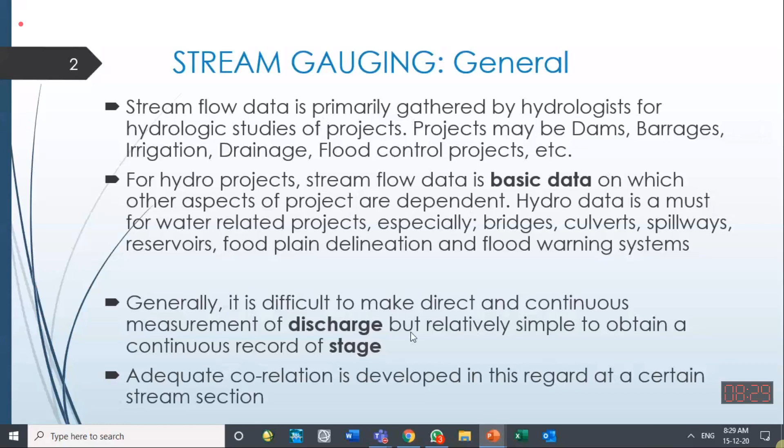Similarly, for structures available with the irrigation department, they take care of stream gauges on those structures. So in the upper Indus in Pakistan, the Surface Water Hydrology Project is most suitable to get the data, and for barrages, it is usually the relevant irrigation department looking after the stream gauges. Generally speaking, discharge and stage are the two things we measure.

Why do we measure the importance of stream gauging? Because we need water for different purposes - for energy, for irrigation, for navigation. Quantification of this water, knowing the water levels and discharge, is essential for using water efficiently. So we need to measure streams at different locations for water supply, human settlement, irrigation, and water for plants.

Streamflow sometimes also causes floods. So if we want to forecast floods, we need to see the behavior of that stream in historical events. What do I mean by behavior? For example, water level or flood level depends upon the channel cross section and channel slope. The same discharge in one channel may cause a flood, while in another channel the same discharge does not cause a flood.

For example, high flood in the Indus River at Chashma starts from 5 to 6 lakh cusecs. 10 lakh cusecs is an exceptionally high flood there on the Indus at Chashma. But for the Ravi, flood may start from 100,000 cusecs - at 1 lakh cusecs, flooding occurs there.

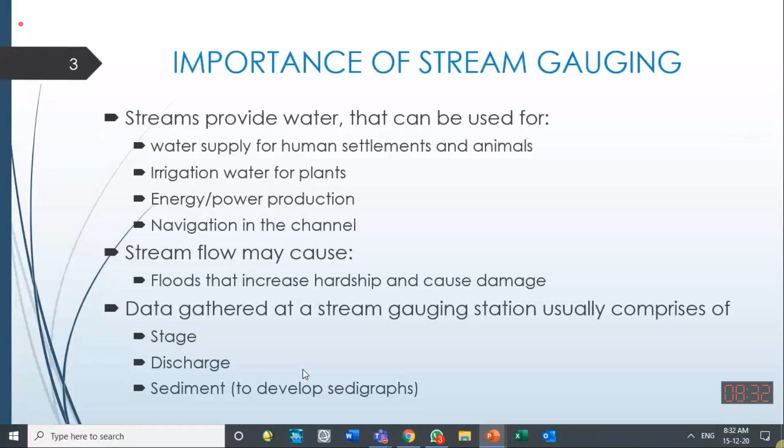So these are the three data usually measured, and in addition, water quality parameters are also measured by environmentalists or water experts. This slide highlights that if you have to select a new stream gauge station, you should take care of these things.

Initially, you should know what factors control the relationship between water level and discharge - what is the factor controlling the relationship between water level in the stream and the discharge and flow rate? There can be two factors, and the factor which controls this, we say...

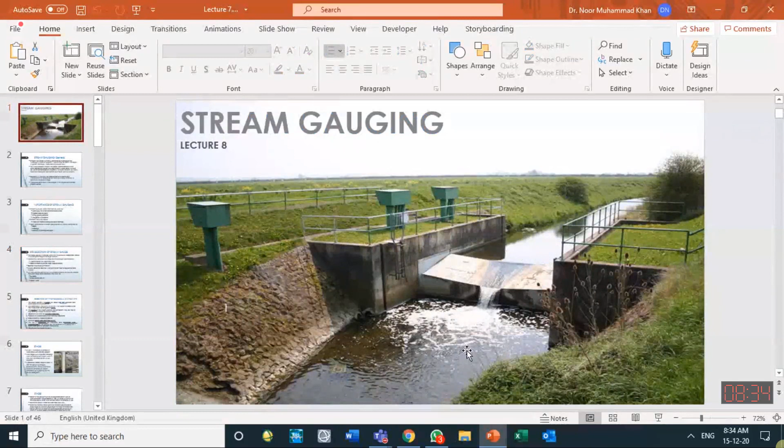An example of sectional control is a fall - a sudden drop in the bed level of the channel. For example, in this figure we can see there is a drop in water level. Such a sudden drop can cause a control over the flow rate and discharge.

Similarly, rapids are steep slope channels, and they can also control the relationship between water level and discharge. If there is a weir or an obstruction in the floor, that can also give us a control - we call that sectional control. So this relationship between stage and discharge is controlled either by a cross section - which can be a fall structure or an obstruction like a weir structure - or the depth and discharge relationship is controlled by the stream itself.

Reach of the stream control. So what do we mean by reach? If there is no rapid, no fall, no obstruction, there is still a relationship between water level and discharge. So what is controlling that relationship?

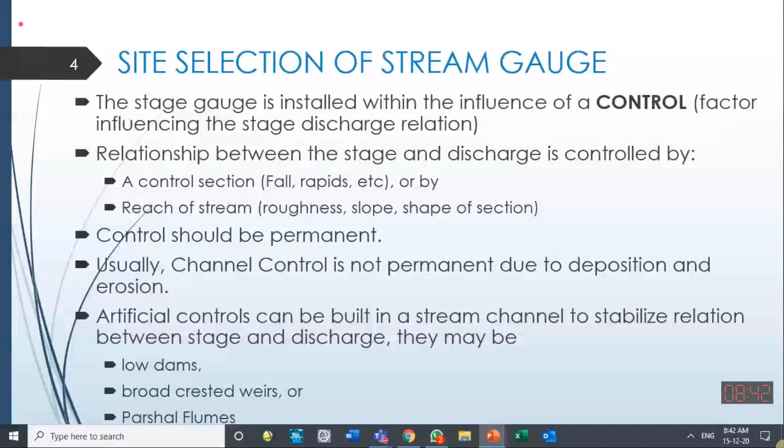So we should be able to construct such structures if we want to install an artificial control in the channel. Knowing the concept of control and the types of control, here are the guidelines you should observe while selecting a new stream gauging station.

It should be installed at a relatively straight reach. What's the alternative? Installing a gauge station on a curved reach. If you've been to the northern areas, you've seen rivers like the Kunhar River making many curves—curvature is present there. We should avoid locating the stream gauging station close to a curved part of the stream.

At least 300 feet upstream and 300 feet downstream of the station should be straight reach. The reason is that on a curvature, water depth is usually higher on the outer side, the convex side. Picture the plan view of a stream with a curvature—one side is the outer part (convex), the other is the inner part (concave). On the convex side, depth is usually higher, and on the inner side, depth is lower.

Insert a line. For example, you have a river like this, and a tributary is joining over here. So the flow is from top to bottom. If you have installed a station over here, insert shape. If you have installed a station over here, it means you are interested to know the discharge and stage of this channel. Okay, of the left channel in this figure, you are interested.

So if there is a tributary coming over here on the downstream side of this stream gauge, and this tributary is quite large, when it joins water to this place over here, there is a possibility that this water goes up also, in addition to going downstream. So depending upon the channel slope, some effect of this tributary can proceed on the upstream side also. So we should avoid locating the stream gauging station where a downstream tributary can affect the water level of the stream gauge on the upstream side.

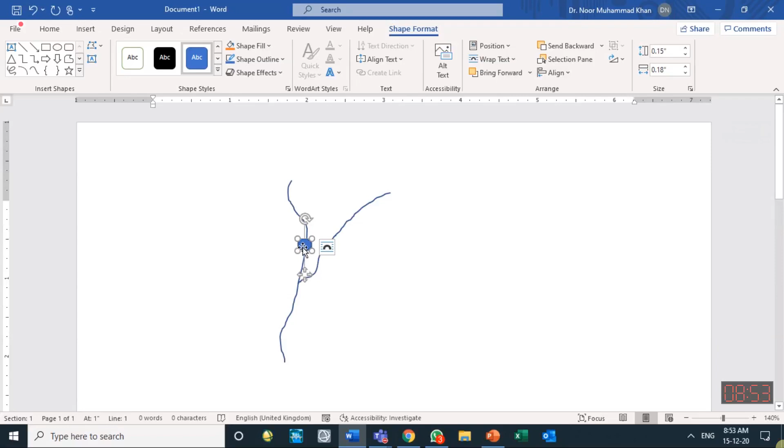If I have measured a water level at this stream gauging station, and the water level was wrongly increased because of this downstream tributary, the effect of this tributary has raised the water level to a higher elevation. It means I will be giving a wrong message to the people that more flow is passing over here, when all that flow was actually coming from this tributary.

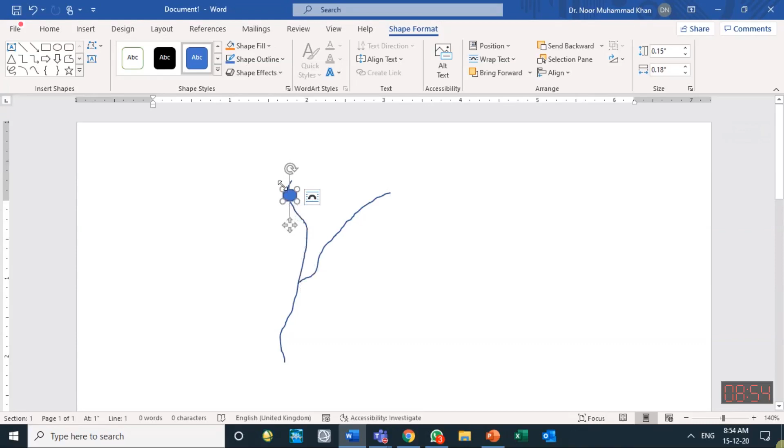We will be giving wrong information that this tributary is having higher flows. So for this reason, if this is the case, we have to move this station either downstream of this confluence, or we have to move it sufficiently upstream so that the effect of this confluence point is not there.

So when we place it downstream of the confluence, we are measuring the discharge coming from both of these streams. And if we place it upstream, then we are measuring discharge of just one stream. So both options are okay, fine for us.

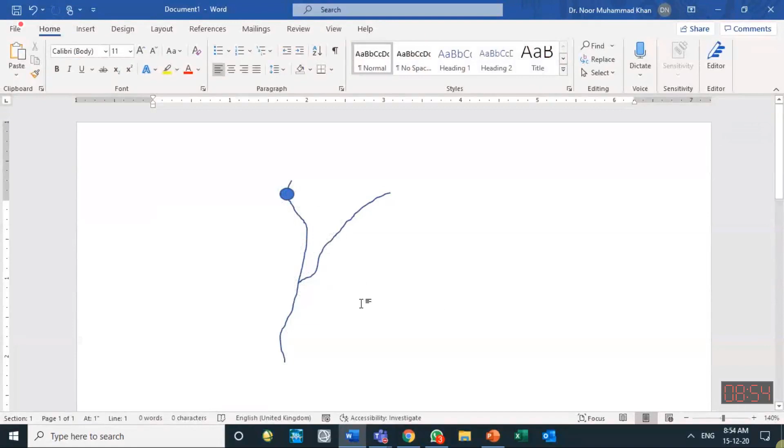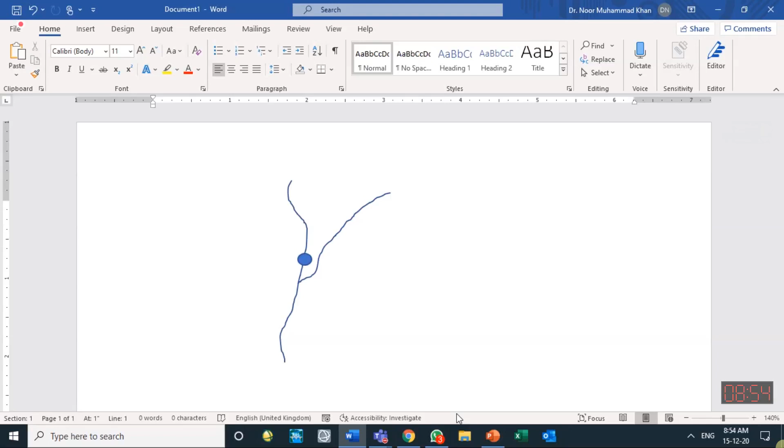But if I put it close to the confluence and tell people I am measuring the discharge of only this stream, when actually the effect of these streams is also reaching over here, that will be a wrong message going to the people, and we have to avoid that. So that is the meaning of the requirement: there should be no backwater effect from the downstream tributary.

This is important when you visit a stream gauging station which has already been constructed. You should check for such things. If there is some tributary on the downstream side whose effect can reach the stream gauge station, then you can comment that this is not the right location, and it should be changed. A stable cross section should be there.

A stable metering or measuring section should be there. That is again related to sedimentation and deposition. The station at which we are measuring should be stable. It should not be changing its size or its cross sectional dimensions. So it should be stable.

There should not be much debris and floating matter. The reason is that one of the instruments we use to measure discharge is called a current meter, which is a rotating instrument. So if there is much debris or floating material, it can damage the current meter.

So debris and floating matter need to be avoided. If you have the option between a low-debris station and a high-debris station, we will select the location with low debris and floating matter.

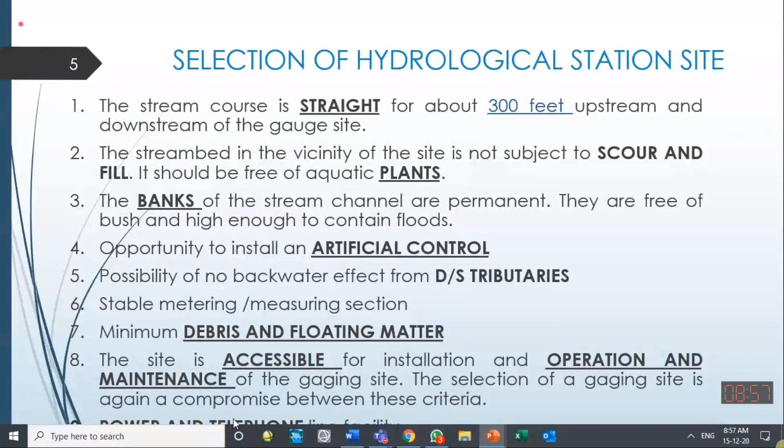The site should be accessible, because you have to frequently go there for operation, maintenance, and observation. It should have easy access. Stream gauging stations located close to an existing road network are preferred, because going to the station and coming back to the head office should be an easy job. There should also be power and telephone facility available at those locations.

So one of the things which we measure is stage.

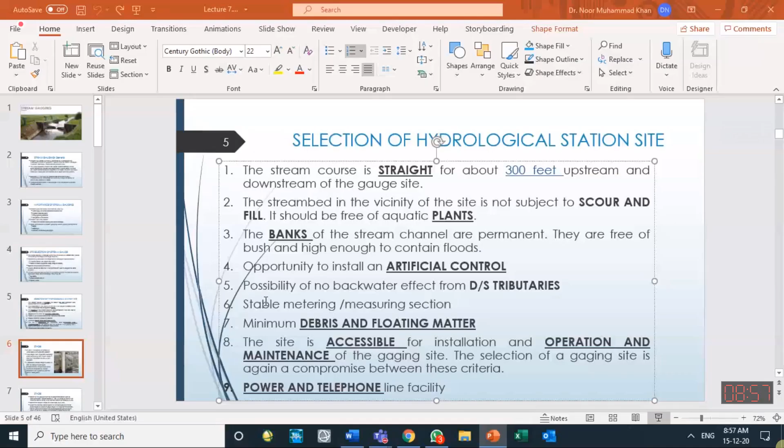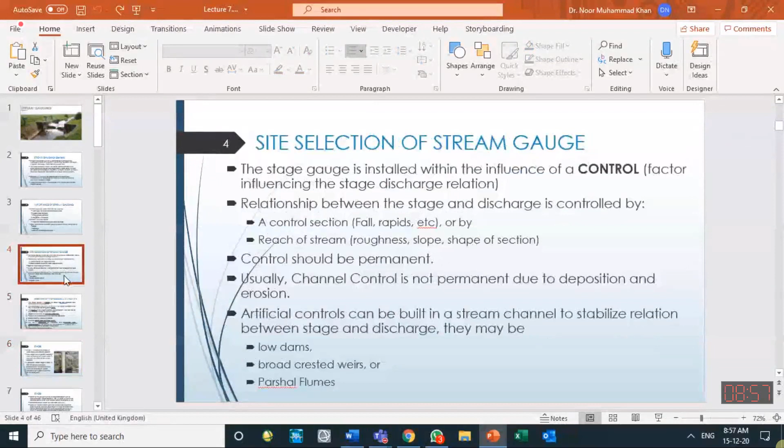Now, if you have any question — that was important: location and site selection for a stream gauging station. You should understand them and try to implement them whenever you are site in-charge, or whenever you are the person who has to decide the location of the stream gauging station.

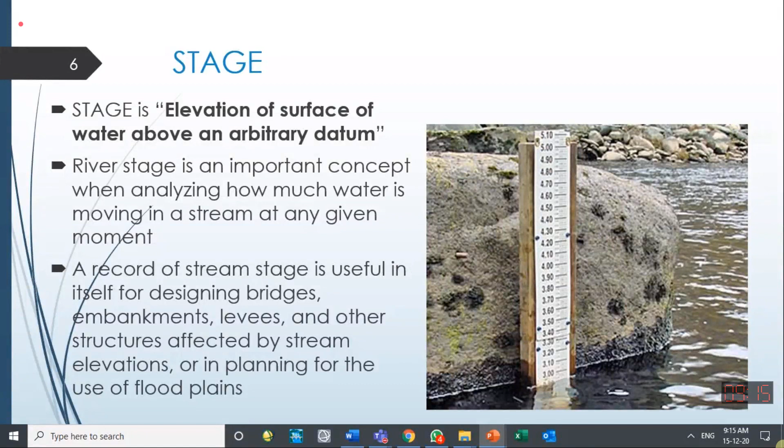What do we mean by gauge structure? This one is a gauge, a stage gauge measurement staff - this is a staff, showing you 3.9, 4, 4.10, so 4 meters or 4 feet above a certain zero level of the datum. So those datums should be linked to permanent benchmarks, selected in such a way that they should not be movable.

Permanent reference points should be there. For example, bring in your mind a stream gauge location, a stream, and you mark three fixed points as your reference points, and from those three points, you know that your stage staff zero level has so much elevation from those fixed stations.

For example, one station you have selected at the top of the road. At the top, there is a milestone installed, and you consider that a permanent milestone that is not moving, so you select that as your reference mark. From that milestone mark, you can correct the level of your stage staff if that staff has been moved because of some flood event or some other reason.

If you want to reset it again, you can carry out the survey, carry out the leveling activity, and set the zero level of your stage staff again. So you should have at least three permanent reference marks so that if you want to recheck the staff, you should be able to do it, or if the staff has been moved from its place, you should reset it again using those reference marks.

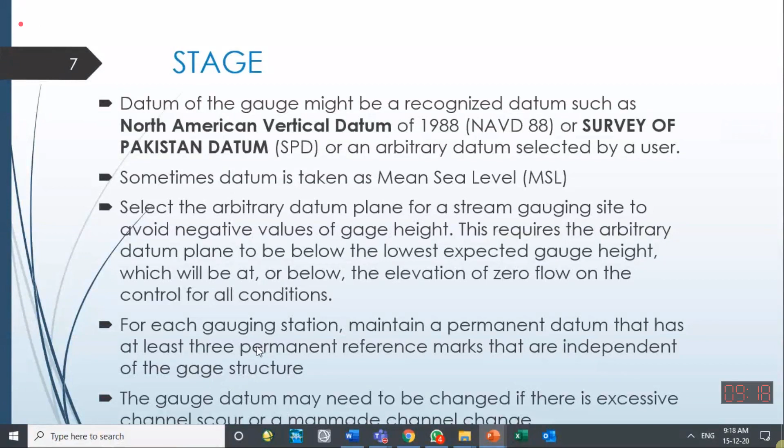The gauge datum may need to be changed if there is excessive channel scour. Again, scour and deposition do affect our stream gauging station. So if there is excessive scour or deposition occurring, we may need to change the location of that stream gauge, or shift the staff to another place so that we can measure the water levels.

Why do we measure the stage? Because this stage is an indication, the level of the water is an indication of the discharge, because it is known that discharge is a function of the depth of water or elevation of the water. Discharge is a function of H, which can be depth or elevation. You should know the difference between elevation and depth. Both are not the same thing.

Elevation is the level of the water with reference to datum, while depth is the level of the water with reference to bed. So if the datum is the bed of the channel, then stage and depth will be the same. But if the datum is somewhere else, then your elevation and your depth will be different values. So at one location, elevation of water can be 110 meters above the datum, but depth may be 1 foot or 1 meter above the bed.

So both are different things. Depth and elevation you should keep in mind. Usually people mix them. They want to talk about depth but they mention levels, or they want to mention levels but they mention depth. So you should be careful about this.

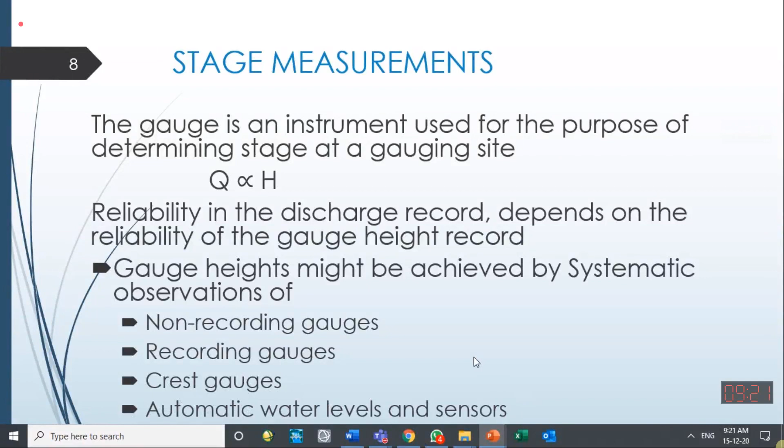A few gauges are frequently used in the field. The most simple one is a staff gauge, similar to the staff you have seen in the survey laboratory - a wooden or metallic staff with graduation marked on it. It is installed in the stream, and the zero of that staff is linked to the datum, measuring elevation with respect to the datum you have selected.

If you have selected the datum for your project yourself, that's fine. If you have selected datum from mean sea level, you should find a benchmark in the close locality whose elevation is known. For example, a permanent benchmark by Survey of Pakistan is close to UET outside gate number 2, linked to the Pakistan triangulation network. From there we can bring level to a station close to our stream gauging station and install the staff gauge accordingly.

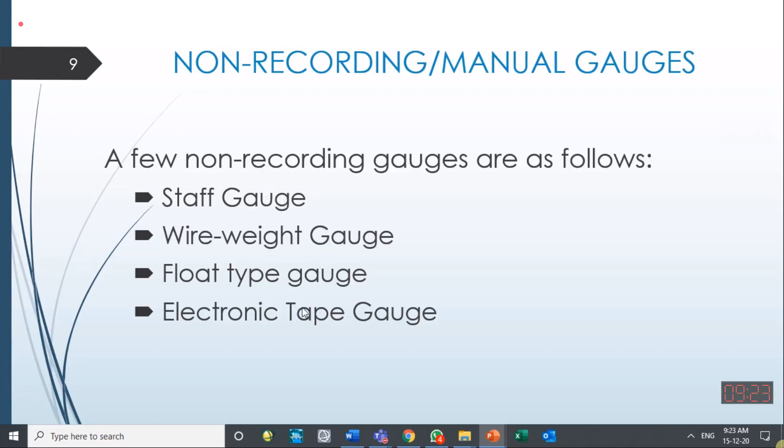So one is staff gauge, one is the wire weight gauge, one is float type gauge, one is electronic tape gauge. Staff gauges are simply wooden or metallic pieces with graduations marked on it, in meters or in feet.

The standard staff gauge is recommended by USGS - United States Geographical Survey. Anybody remember what it is?

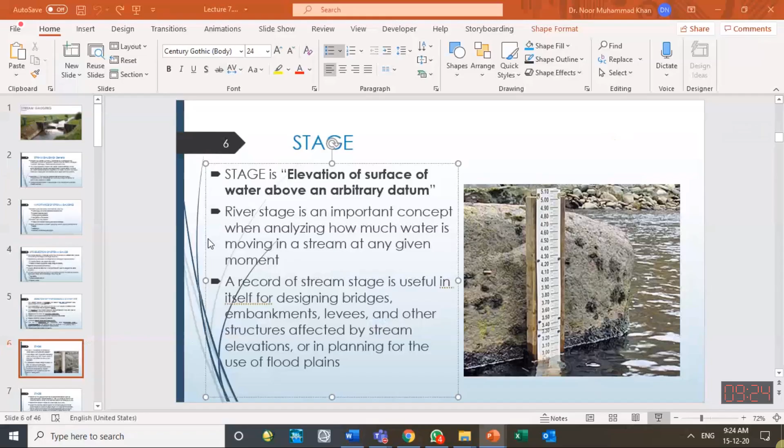Sociological survey? Geological survey? Geological survey or geographic survey? Sir, geological survey - United States Geological Survey.

Why is everybody so sleepy? Why is nobody stopping me?

The United States Geological Survey recommended a standard staff gauge. It should be built consisting of porcelain enameled iron sections, made of porcelain, with width 4 inches and 3.4 feet long. If you have to measure more depth, multiple 3.4 feet staffs can be used for measurement of the stages. The least count should be 0.02 feet, graduated every 0.02 feet.

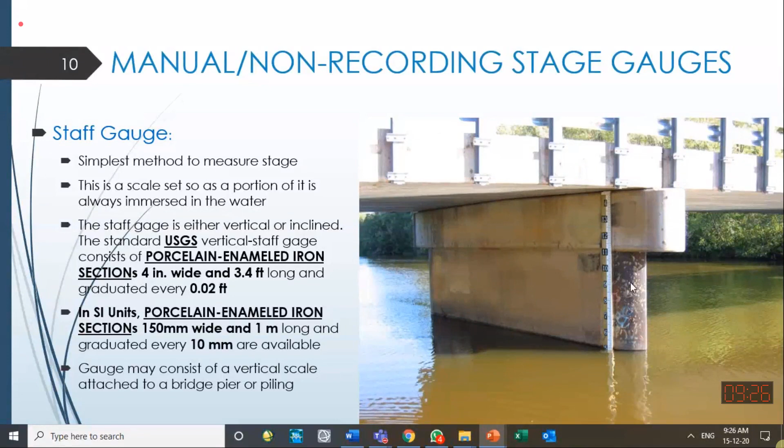You might have seen such gauges installed on the pillars of bridges, on banks of channels. If you go to any bridge - Ravi Bridge, Shadra, or Saggian Bridge - you can see a staff gauge installed there.

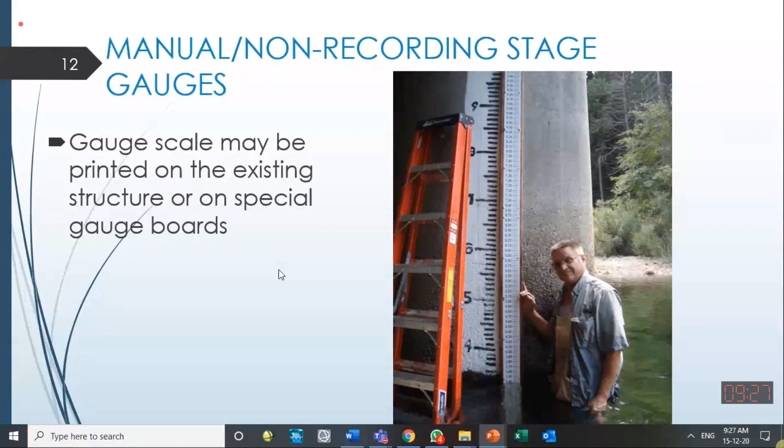Here is a staff gauge installed somewhere, I think in the Ravi River close to Jasser. They have just marked it and are using it. This will work fine as long as this pillar is not settling, or if the bed of the channel doesn't have excessive sediment deposition or erosion.

The marking should be renewed every year, because with the passage of time they vanish away, like they are faded away over here. So they need to be refreshed every year.

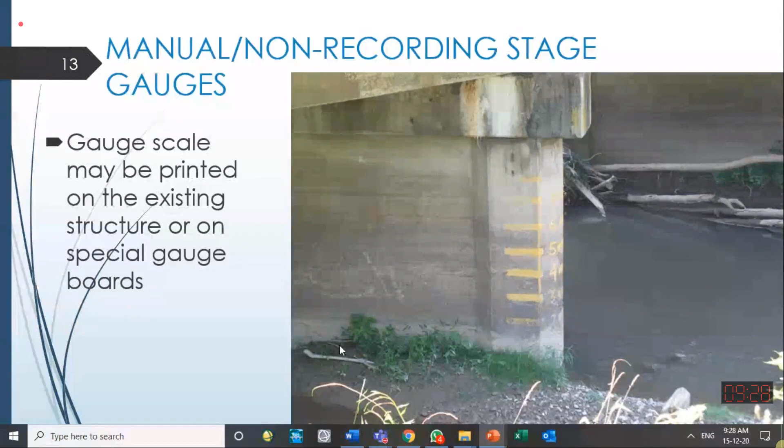So an inclined staff gauge is used for an outside gauge and usually consists of a graduated heavy timber securely attached to a permanent foundation.

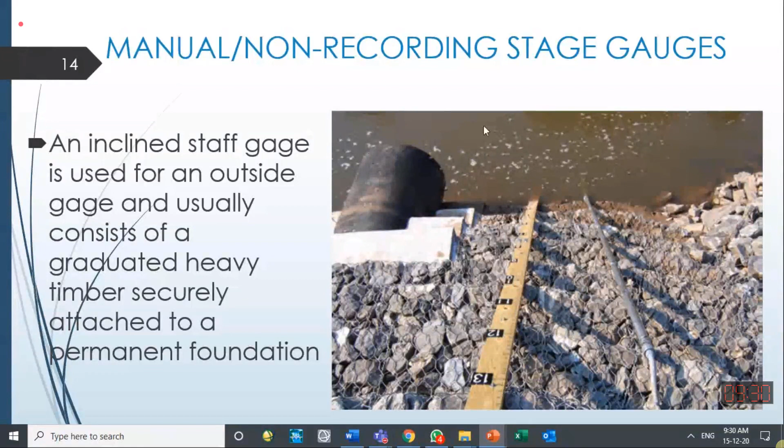Sometimes we have sectional gauges installed. A number of staff gauges are installed and have the stage measured for a channel having a lot of variation in depth over the year. So we can install a number of staff gauges at suitable intervals so that during high flood we still have a staff gauge available to measure the level, and if it is at low stage, we still have a staff gauge installed which gives us the water level.

For example, if there were only one staff gauge of longer height, then you would need a boat to go over there to measure it. But if we have sectional gauges like this, one gauge, second gauge, third gauge, fourth, and as many as you need, then you will be staying on the dry location, on the bank of the channel, to read the water level.

Those gauges which are underwater will not be of any interest to you. Only the staff gauge which is partially underwater and partially above the water will give you the correct stage value. And all of them are linked with each other: 2 meters over here is 2 meters over here, 4 meters over here is 4 meters over here. So if we want to install a new staff gauge, its 6 meter mark will start from here and go up. So all of them are linked to the same reference surface, or same datum point.

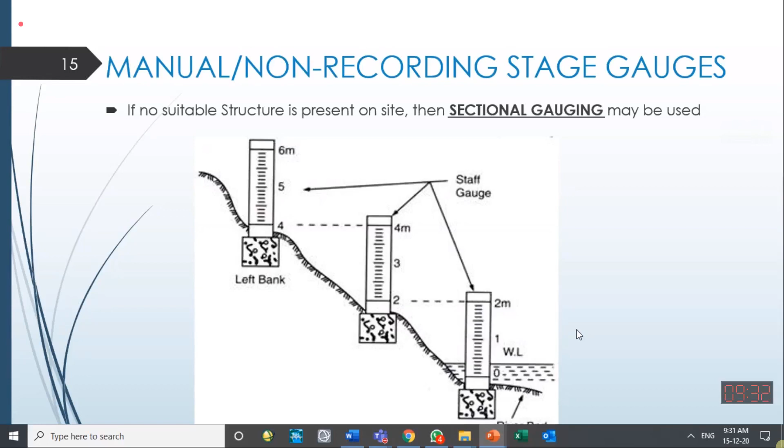So here is the actual installation of the staff gauges, sectional staff gauges, 1, 2, 3, 4, 5, and so on - there can be many. These are good when there is a huge variation of water depth from the lowest water level to the highest water level. Then sectional staff gauges are required.

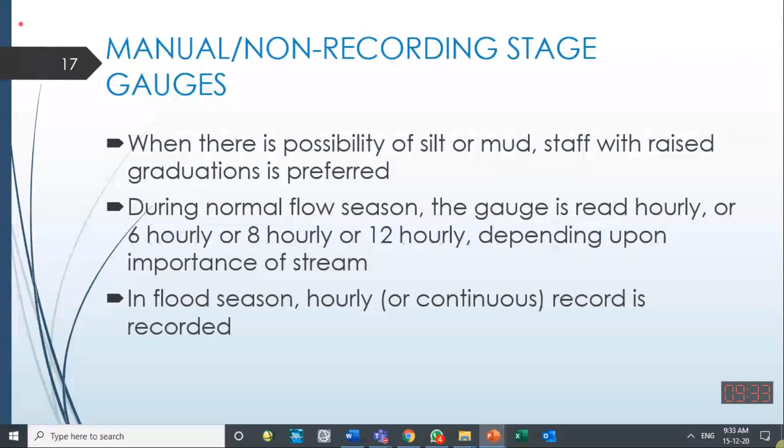During normal flow season, the gauge is read hourly. So how frequently do we have to observe the stage? If there is a lot of fluctuation in water level, then we need more frequent observation. For example, in high flood season we usually have hourly observation, or sometimes more. While during very calm times with much less fluctuation, it's 6 hourly or 8 hourly.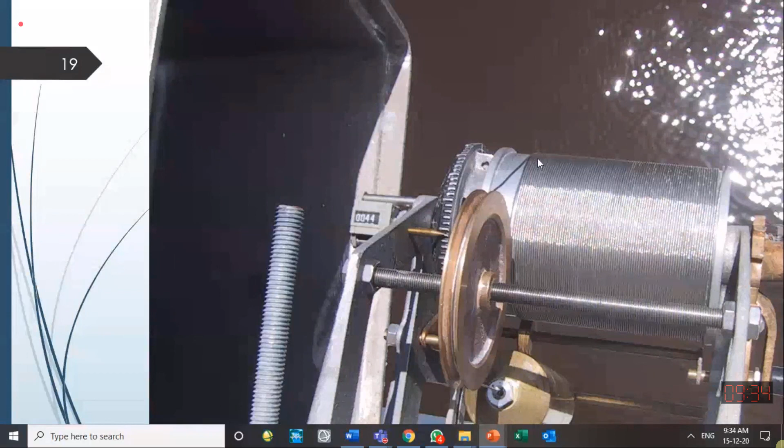Another kind of gauge is called the wire weight gauge, quite frequently used. We have a box which contains this wire weight gauge. A weight is suspended with the wire, and that wire is wound around a drum. You see this yellow color - this is a bronze weight, made of bronze so that it is corrosion protected, because it has to stay in the open environment.

So the weight is suspended with the wire, and the wire is wound around a drum, and the size of the drum is selected such that one rotation of this drum releases 1 feet of this wire. So one revolution of the drum is equivalent to 1 feet depth of the wire. They rotate this, and it has a counter attached to it so that we know how many rotations there are.

So it is installed at a certain permanent location, like a bridge over here. So when they have to measure the stage of the water, a person goes over there.

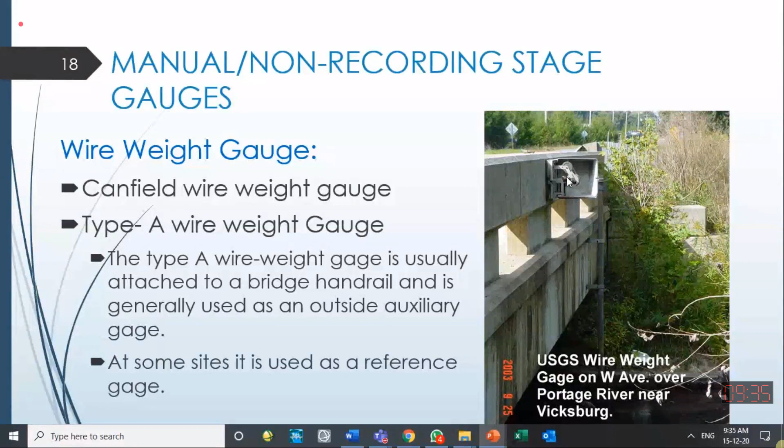He releases the weight. When the weight touches the water level, the number of revolutions of the drum are noted, and that will give them the idea how much is the level of the water.

For example, over this bridge, a wire weight gauge is installed. When it is touching the water, they measure how much is the wire length, they measure H over here. So if they know the elevation of this instrument from the datum elevation, which is G, and they have just measured H, they can find capital H, that is the stage of the water level. Capital H will be the level of the instrument minus the depth of water from the wire, from the bridge itself.

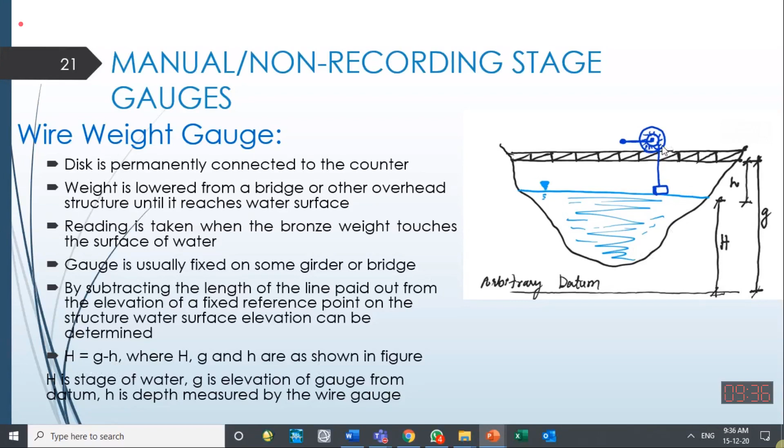So that is small h. Capital H can be estimated, the stage can be estimated knowing the depth of water from this instrument. This is usually used in the field also.

This is another figure for the same. While it is not in use, it is covered with a box to protect it from corrosion or damage. The wire is wound around it, just one cycle of the wire, not duplicated. For that purpose, this wheel is moving left to right, so that there should be a constant length of wire for one round of the drum.

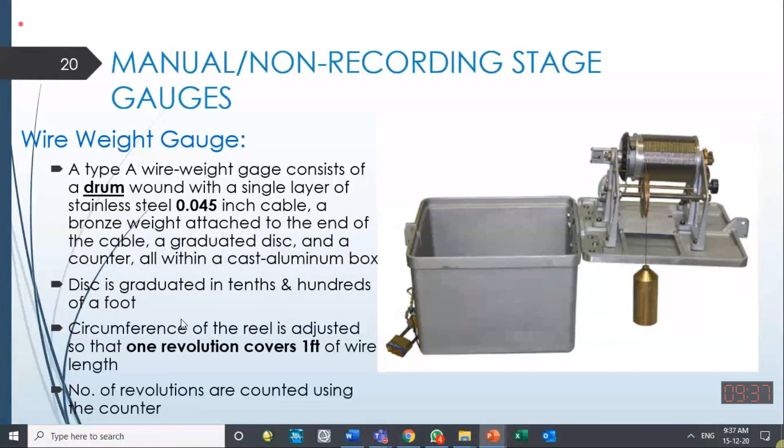Usually the wire thickness is very thin, a 0.045 inch cable is used to suspend the weight. One revolution covers 1 foot of the wire. That is about the wire weight gauge.

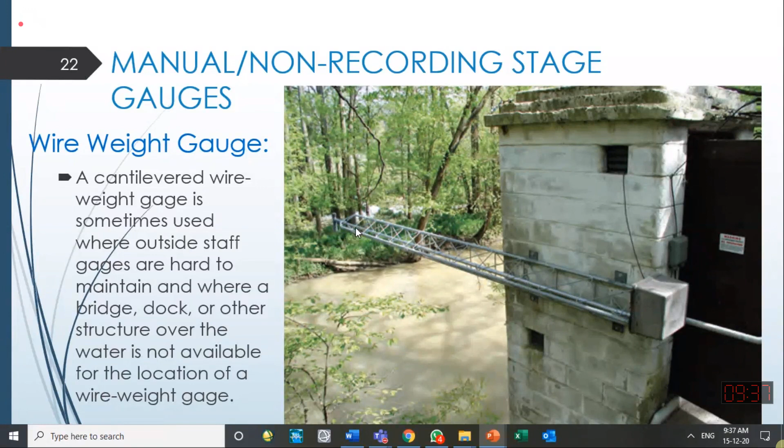Sometimes we suspend them with the help of a cantilever installed on a bridge pier, or some permanent installation on the side. We can install a cantilever frame like that, and install our instruments with that as well.

Another kind of stage measurement is the float type gauge. It is usually installed in a stilling well.

So what is a stilling well? Close to a channel, we can make a well-like structure made of concrete or masonry, and connect that well-like structure or room-like structure with the channel itself. Whatever is the water level in the channel, the same will be the water level in this well. The benefit is that the fluctuations we can see in the channel, and the debris which can affect the channel, will not come into this stilling well. So we will have relatively calm water in the stilling well, and we can observe the water level within it. Observation can be either through a float gauge or through a simple staff gauge. The method of observation can be different, but these stilling wells are frequently used.

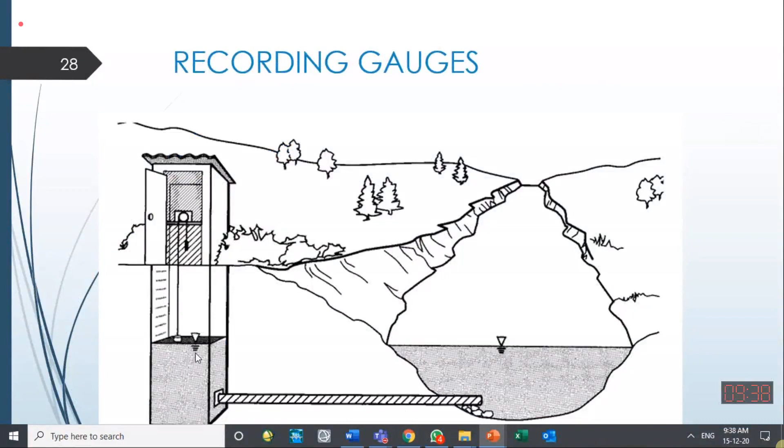For example, I'll show you a stilling well. Here is a channel coming over here. A stilling well has been installed and it is linked with the channel itself. Whatever is the water level, the same is the water level in the stilling well, and it can be observed easily.

If a float type instrument is used for estimating the stage, it has a light material like a float, usually an empty plastic drum is used as a float, and on the other side they have a counterweight. They are linked with each other through a pulley installed over there. As the water level goes up or down, because the weight of both is balancing each other, the water level can move this float up and down.

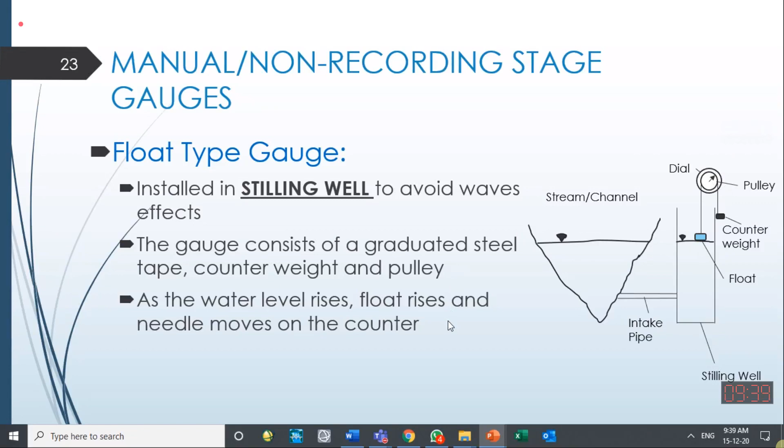As the float goes up and down with the change of water level, the dial on the pulley also changes, so from the dial reading they can note how much is the stage at a certain time and location. This float type here is the actual float gauge. On one side they have the counterweight, on the other side the hollow float, passing over a pulley. As the float moves up or down, either the dial gives the reading, or the rope connecting the counterweight and the float is itself a tape, and this tape reading will tell them the stage, the depth of water at the moment.

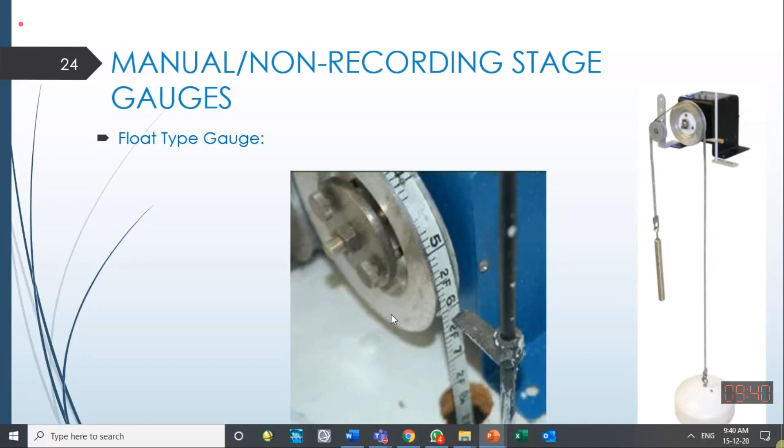So this string can be replaced with a tape. Here they are showing that a steel tape is being used for estimating the stage at a stream gauging station. In addition to this, sometimes they use electronic instrumentation when this float or weight contacts the water level.

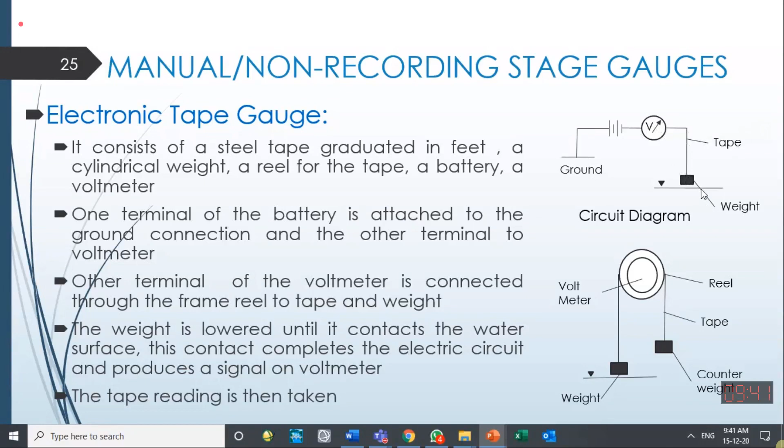A circuit is completed and a signal is generated. They know that at the moment the float is at the water level, and they note the tape reading at this location. This can be used for very deep channels where they cannot see whether the float is in touch with the water or not. So to know whether the float is in touch with the water, they use an electric circuit with a battery installed. One side is grounded and the other side is connected with the weight itself.

A voltmeter and battery arrangement is available just to know when the conductor or the weight touches the water. When they know it is touching the water, they note the tape reading at that point, which gives the stage of the water.

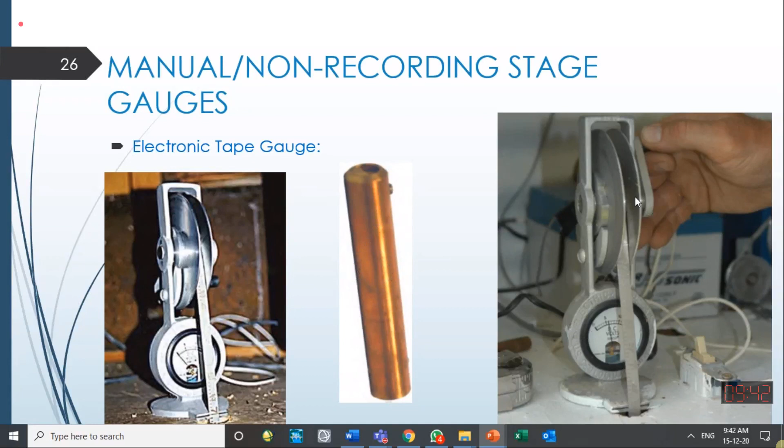Float type gauge installed in the stilling well, already explained. The stilling well is important; we have to take care that its connection should not be choked. Also, when constructing a stilling well, its depth should be lower than the lowest depth of the river, because sediments will come into the stilling well. If there is no room for deposition of those sediments, then this link or intake will be choked, meaning the water level will not be properly conveyed to the stilling well, and it will differ from the actual river level. So the intake needs to be clear at all times.

We can have multiple intakes, one at lower level and one at higher level. We can have different kinds of measurement instruments - a float type instrument or a simple staff gauge - and these are usually used.

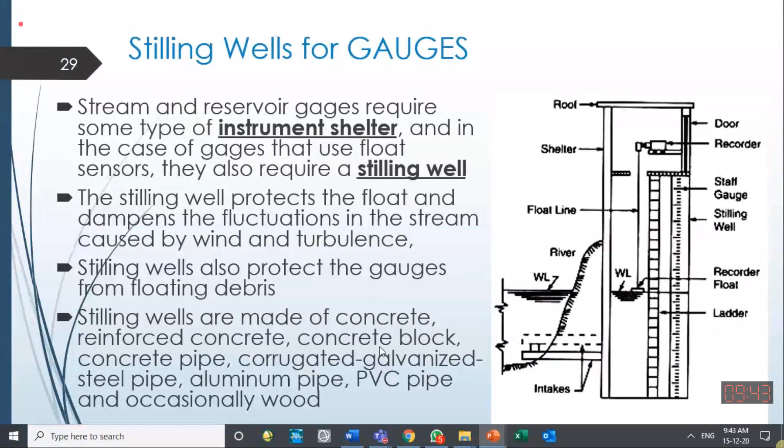Stilling wells protect the gauges from floating debris. One benefit of the stilling well is that no debris and no waves will come into it. They are made of different kinds of material: concrete, masonry, aluminum pipes.

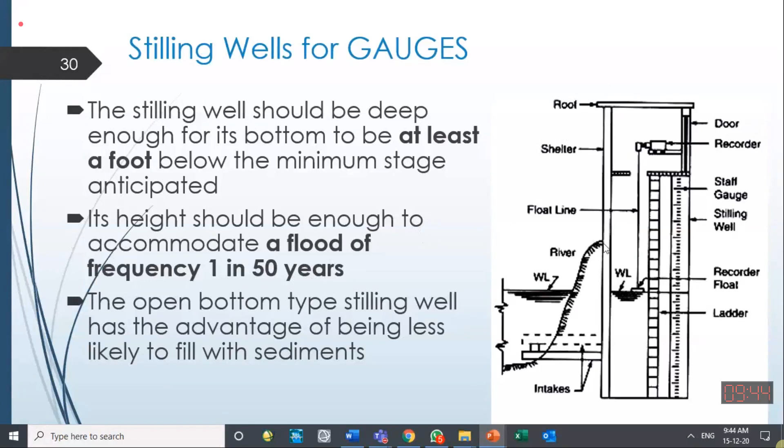The stilling well should be deep enough at its bottom, as already informed. It should also be sufficiently high enough so that the highest expected flood, at least a 1 in 50-year flood, is accommodated within the stilling well. It should not overflow for normal floods that come every 2-3 years. So it should be high enough that a flood expected once in 50 years, which we call a flood of 50-year return period, is also contained within the depth of this well.

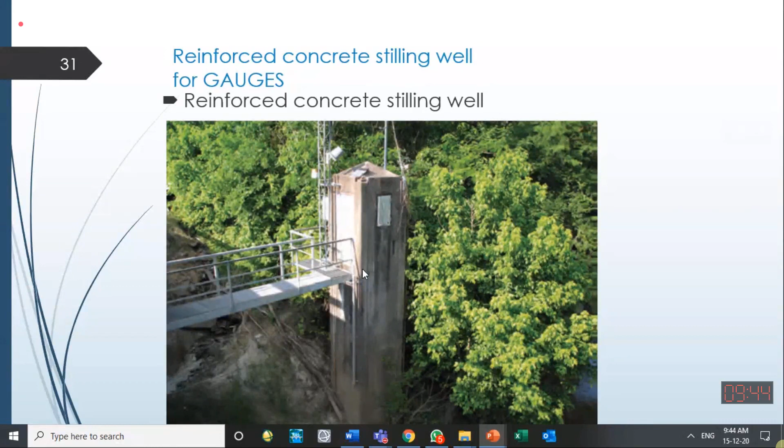Here is an actual stilling well installed, and it can have many other instruments. For example, nowadays stream gauging stations are provided with telemetric data transmission and communication mechanisms. Here are antennas attached so that whatever data is recorded can be conveyed to the headquarters, to the meteorological station, or the hydrological observatory.

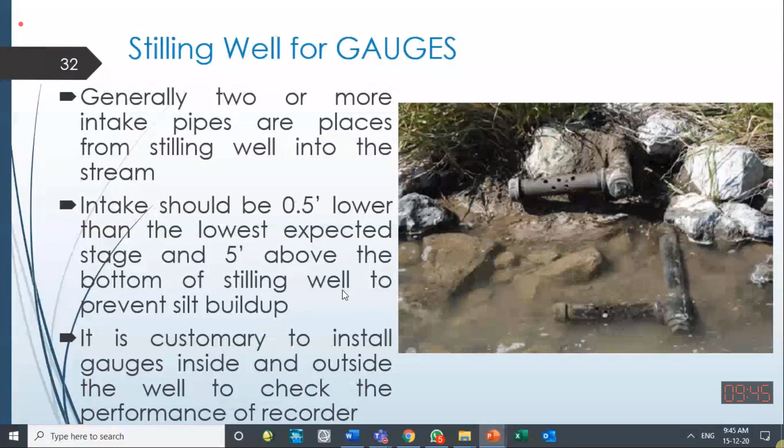Here is a connection of the actual stilling well with the river. If the stilling well connection is above the water level, it will not show the correct water level. So the connection should be at the lowest possible level of the water you want to observe. This intake will only be effective when the water level rises, provided the openings are open. If these openings are clogged or closed, water will not go into the stilling well, and it will not give the correct observation.

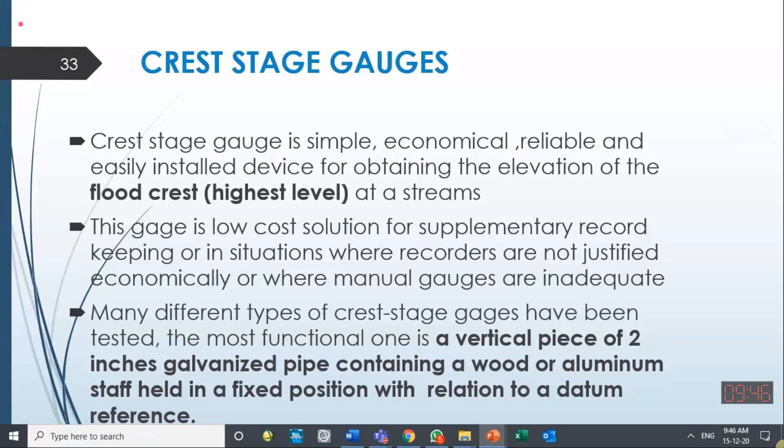At the bottom of the pipe, some light material is placed, some grounded corks are placed. Let me show you the figure of it first. It is simply a pipe, 2-inch diameter, with holes at the bottom from where it can get water into it. At the bottom, there is a container which contains some light material like corks or some thermofoam, small pieces placed inside it.

When the water level rises in this pipe, the corks inside it also rise upward. And when the water level goes down, the highest level which has been recorded will be shown by some of the corks which stick to the staff gauge itself. So some of the corks will remain stuck to the staff, and that will represent the maximum level observed during the last time period.

Got it? So here's the cross-sectional view of that. They simply have a pipe installed over there with openings on the sides. A staff is available over here, and some corks or light material will be there, which can float with the increasing water level.

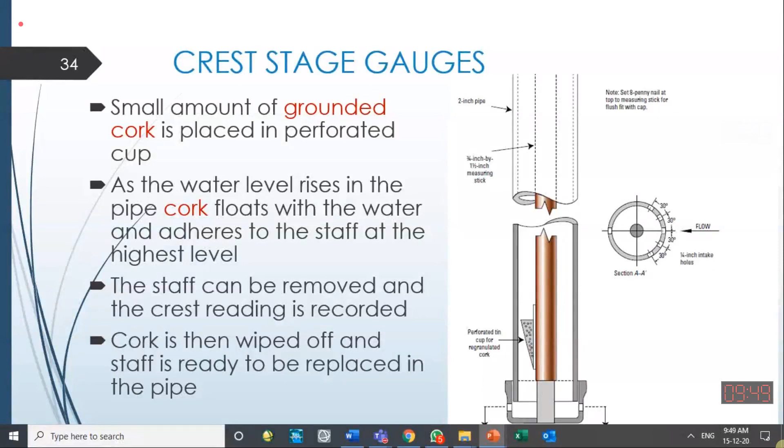Okay, it's fine, hopefully you got it. So this is used to measure the maximum water level in the last time period. I'll stop here.

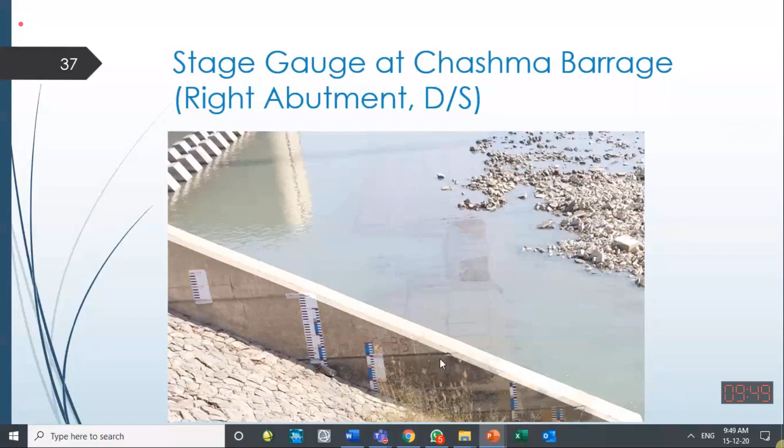There are some figures available of actual staff gauges installed at structures I have visited in Pakistan. I think this is Chashma Barrage. On the side bank of the barrage, they have installed these staff gauges within a stilling well, and the condition of the stilling well was very poor. I think it was choked, and they were not using it for measurement anymore.

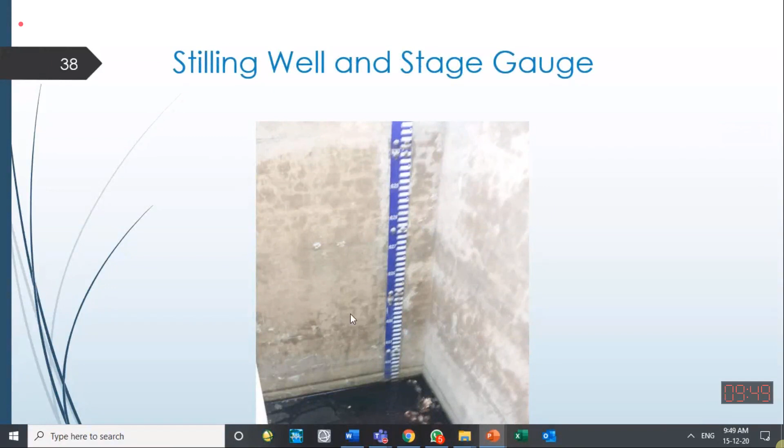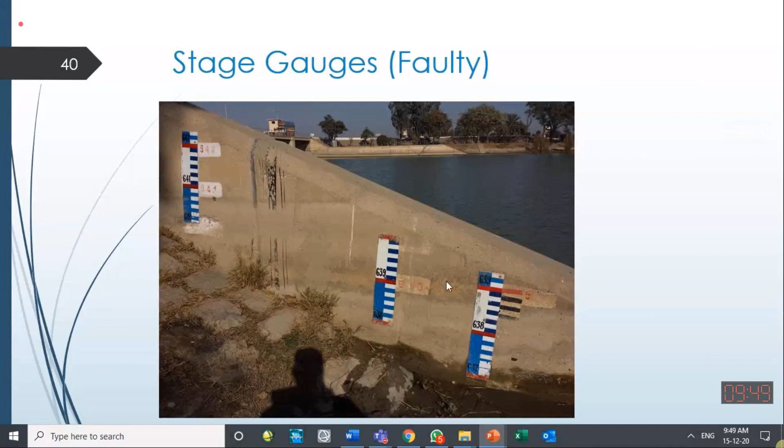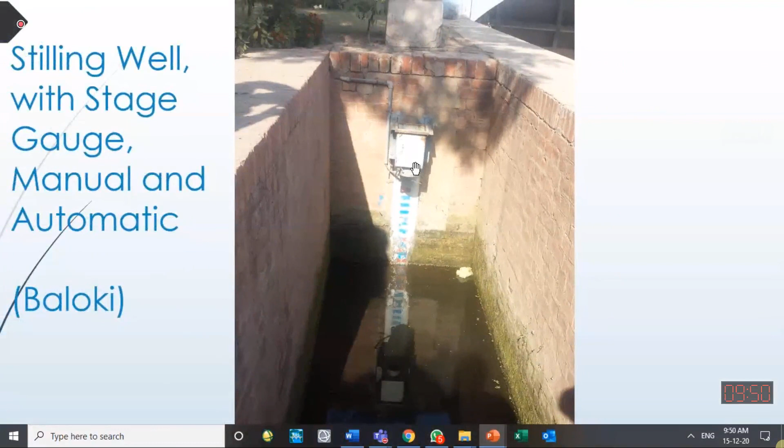They use sound waves to estimate the depth and elevation of the water with respect to this instrument. So they have an auto stage recorder installed, which conveys information to the central telemetric system.

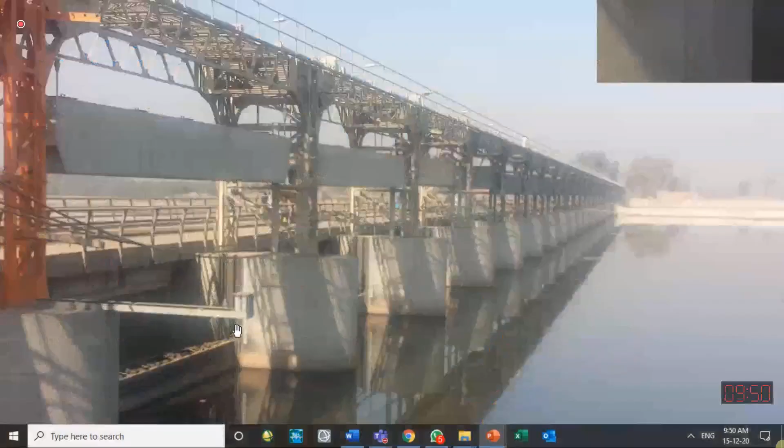Here is a barrage, and on the pillars of the barrage you see a water level sensor installed with a cantilever, and this instrument measures water level with the help of sound waves. In the background you can see the staff gauge also there, with the markings at the back. This is a close view of that.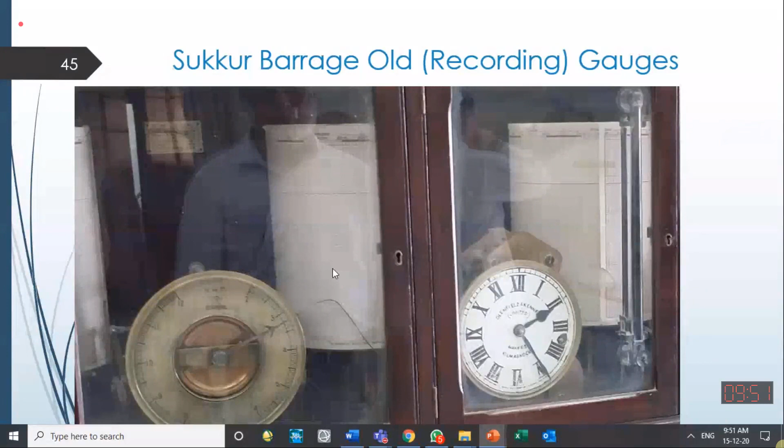This is the first part of stream gauging. Today we have just seen different kinds of staffs: recording, non-recording, float type, and crest gauges. Next time we will see how to measure the discharge in a channel using a current meter, and how to estimate the discharge in the channel if you have the current meter readings with you, how to compute it. Okay, so I stop here. Thank you very much.